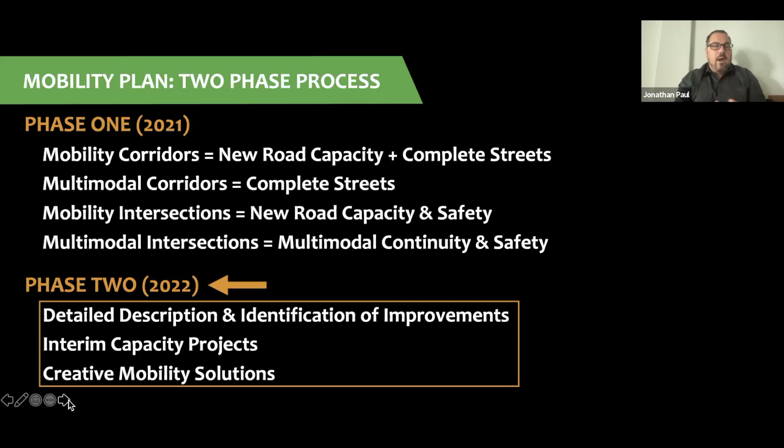That formed the basis for the mobility fee, with the intention that further detail would come as part of the Phase 2 mobility plan, which is where we are today. This is a detailed description and identification of improvements, both multimodal and for roadways, identifying interim capacity projects that could be done in the next few years, and longer-term potential widening of roadways. We also focus quite a bit on creative mobility solutions to get people around by means other than driving. That's really where we are in terms of Phase 2 of the mobility plan.

Previously, prior to the city adopting a phase 1 mobility plan, the priority and emphasis was really on vehicles and moving cars as quickly as possible, evaluating longer trip lengths, addressing roadway crashes, and really designing a system for commuting by vehicle.

The streets of the future—the city had already done a comprehensive plan amendment that laid the groundwork for a mobility plan and a multimodal system. Phase 1 took it to the next level.

Phase 2 gets into the overall detail of projects, with a priority on lowering vehicle speeds on local and collector roads. There's a direct connection between speed of travel and safety for people walking, bicycling, and accessing transit. So we want to emphasize slower speeds on local and collector roadways and safety for all users on arterial roadways.

We also want to focus on accessibility—how easy it is for people to get to and from wherever their destinations are.

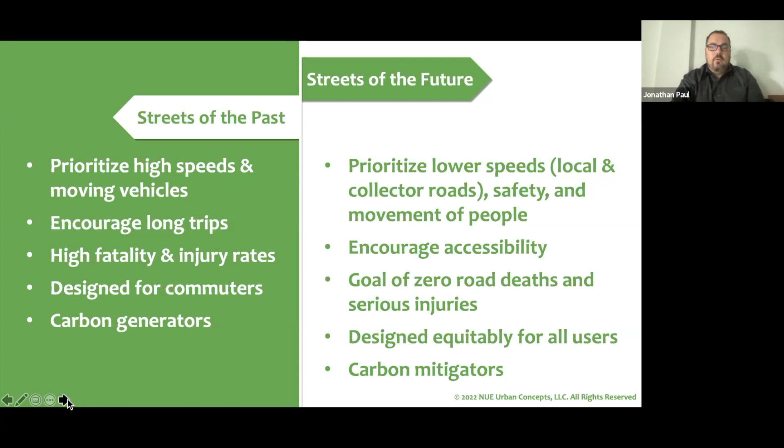Beyond just walking, bicycling, or driving a car, there are new forms of travel being considered all across Florida—whether an electric bike, a neighborhood electric vehicle or golf cart, electric scooters, water taxis, or even ride hailing and ride share services.

Most people are familiar with Uber and Lyft, but those are becoming an increasing way for more and more people to get around other than just driving.

There's also an opportunity to look at our streets differently. I call it, in some respects, complete streets 1.0—that's where we've been for the last 20 years in transportation planning and engineering in the state of Florida.

The focus has been on just getting a base level of facilities, whether a 4-foot bike lane or a 5-foot sidewalk—just a bare minimum multimodal addition to our street cross sections.

As more and more communities across Florida are urbanizing, and they've reached the point where they've already 4-laned or 6-laned roadways, there really aren't a whole lot of road capacity alternatives open anymore. If they are, they're fewer as part of the overall network.

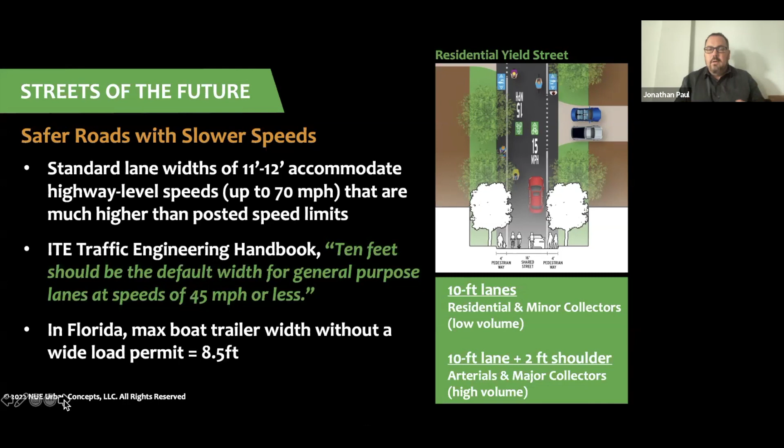So moving forward, a lot of the cross sections we're proposing are looking at 10-foot travel lanes for local streets, and arterials and collectors also having 10-foot lanes, but then providing some buffer for 2-foot shoulders - the visible travel lane itself narrowing down to 10 feet in width, in addition to the multimodal improvements that we're talking about making.

Streets of the future, especially within Port St. Lucie itself - most of the roadways in the community are known as open drainage or swale roadways. They're actually designed to hold stormwater when it rains on the side of the road.

And some of the old portions of Port St. Lucie itself - a lot of residents, or people that haven't been in Florida a long time - some of those neighborhoods that are built in the 70s and 80s, even early 90s, during that time, there was a trend for the roadways themselves to actually accommodate a foot of water.

So the roadways themselves in communities were actually part of the stormwater system. Somebody coming from up north or from an area with a lot of curb and gutter roadways might think there's always flooding in the city, but in fact that's how most of the roadways were actually designed. Even parking lots and commercial shopping centers during the 70s, 80s, and 90s were sometimes designed to hold a foot of water in them.

But going forward, as we add multimodal facilities, there's going to be a need to add additional vegetation to treat that stormwater as it goes into the aquifer and eventually flows down into the St. Lucie River.

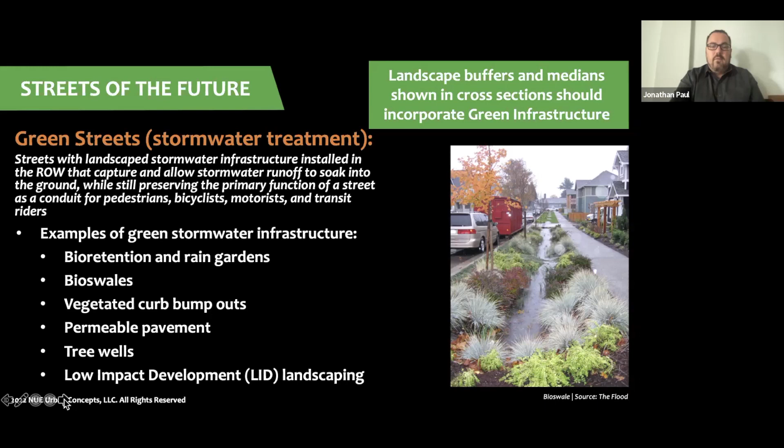So in this phase, the mobility plan phase 2, we're going to show several cross sections and maps, but ultimately there will be maps, cross sections, and a very detailed table explaining what's being proposed for each roadway corridor in the city that's a collector or arterial roadway. Some of these corridors may have multiple phases, where there's a multimodal improvement initially, and then eventually a widening or additional multimodal improvements.

So these are some of the corridors we're going to look at. As we proceed further as part of this overall mobility plan, there'll be several graphics like this produced with St. Lucie examples.

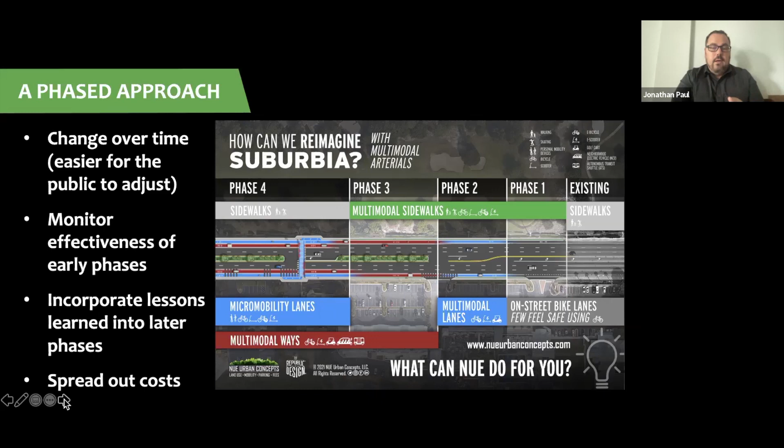So the focus was really on corridors for the phase 1 mobility plan, and we built on that for phase two. This phase two is really focusing on the speed of travel.

People walking go between 1 and 7 miles an hour. People bicycling go anywhere between 7 and 15 miles an hour. People on a scooter or an electric bike could go upwards to 15 or 20 miles an hour. People on golf carts and autonomous transit shuttles can go up to 20, and shared mobility as well.

So really, all these speeds of travel are less than what most cars and most posted speed limits are on roadways. I believe the lowest posted speed limit on a street in the city of Port St. Lucie is 25 miles an hour, that's the lowest. So all these modes of travel we're talking about actually travel slower than the lowest posted speed within the city itself.

This mobility ordinance is going to also be setting the stage for what's known as micromobility. These are electric bikes, electric scooters, segways. Some people may have seen people riding along with a skateboard with one wheel in the middle of it, called a one wheel. There are a whole bunch of micromobility devices out there, but electric bikes and electric scooters are the most common ones. The plans we're talking about really look to add facilities for those modes of travel.

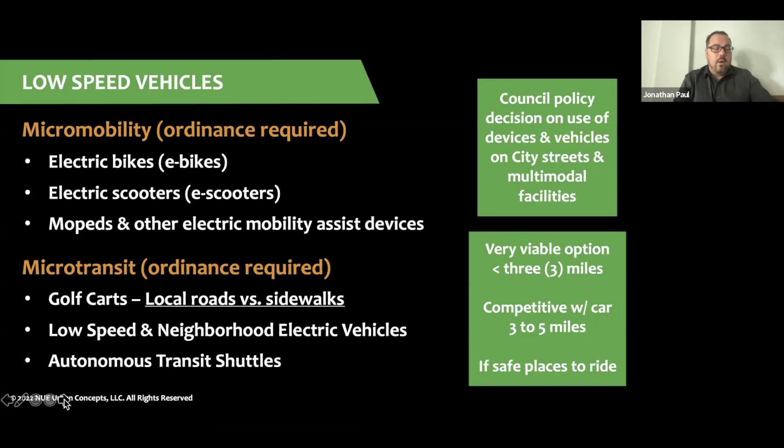Increasingly, I don't believe there are actually any in Port St. Lucie yet, there will be on Floresta, but several communities' Department of Transportation is moving towards what's known as a buffered bike lane. So you have a 4 to 5 foot wide space for a bicycle, and then a 2 to 3 foot wide space that either has double lines on it, or double lines and what's known as a chevron marking or skip marking along it.

Then you have protected bicycle lanes, where there's actually a raised median or some type of physical barrier between the roadway travel lanes and the bicycle lane itself.

What we're calling multimodal lanes - think of a 5-foot sidewalk, but it can also be used by a golf cart or an electric bicycle or an electric scooter. That would be a multimodal lane.

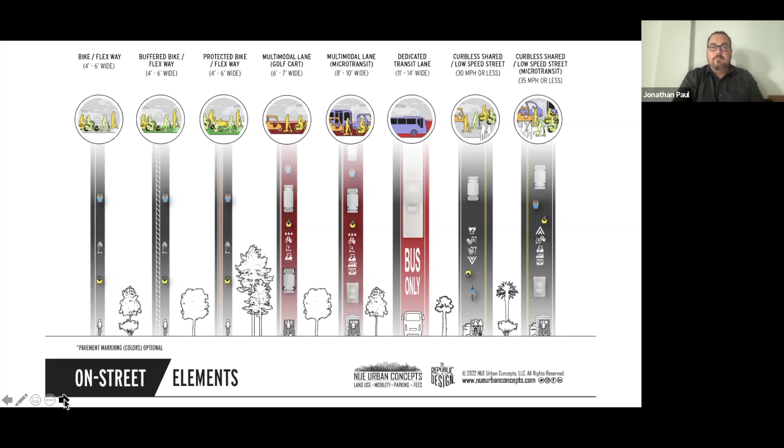And then there are other types of facilities that are basically a shared street, where these electric modes of transportation share the street with motor vehicles. So those are all types of on-street facilities that we've looked at.

We're really focused heavily on providing off-street facilities. One, they've tended to be safer. Two, they get a lot more visibility from people walking and biking. And three, most people feel safer actually using them, so they have a much higher utilization rate. So a lot of the improvements we're going to be talking about are actually off-street facilities.

If you look at Village Parkway or portions of Traditions Parkway, they're adding off-street facilities for various multimodal and micromobility vehicles. The first one's actually like an off-street bikeway - a separated bike lane or bike path for bicycles and scooters, separated from traffic. Then you have a bi-directional bikeway or cycle track, separated from the street. And then eventually you get up to sidewalks.

Most people know what a sidewalk is, for 5 to 7 feet. They're really not appropriate for golf carts to be using, and quite honestly, they're not appropriate for electric bikes or electric scooters to be using either, especially with people walking.

Then you have a shared use path, which allows people walking, bicycling, or using a scooter. And what we like to call this is people powered. Think of if you're using your own two feet to move, whether you're scooting, bicycling, or walking, that's a people powered facility or a shared use path.

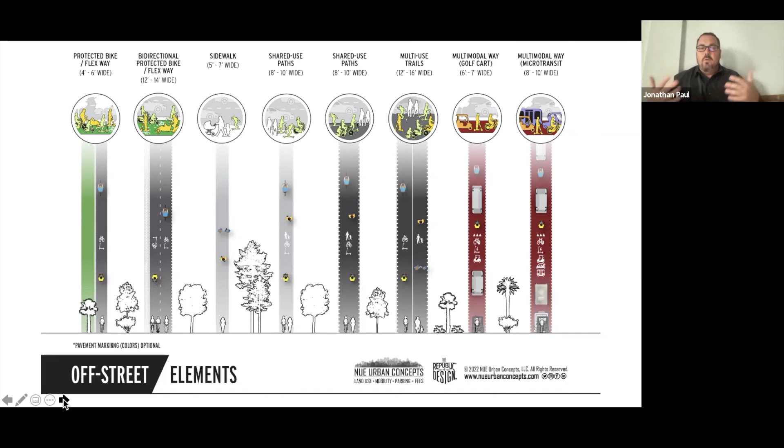So this is kind of just providing a bigger overview, and then we're actually going to get into some of the more specific types of improvements here. But just in general, Port St. Lucie is a very large city. It's got an extensive roadway network, and not all the roadways are the same. So we've sort of developed some criteria for how we're going to look at roadways.

And so the ideal multimodal scenario is you have a separate space for cars, a separate lane or way for electric powered vehicles, scooters, bike, golf cart, and then a shared use pathway or a trail for people walking, bicycling, or scooting using their own feet.

As an alternative, the multi-use trails or shared use paths that are at least 12 foot to 16 foot in width could be used for people powered micromobility and golf carts. So really you're looking at the width at that point, and the minimum preferably is 12 foot wide to safely accommodate all these different users.

And the third alternative that we've sort of looked at is where we can't have separate facilities because of right of way. We'd look to have an on-street multimodal lane for electric powered vehicles. And this is primarily roadways that are posted speed limits of 40 miles or less. So you're not going to necessarily see this out on...

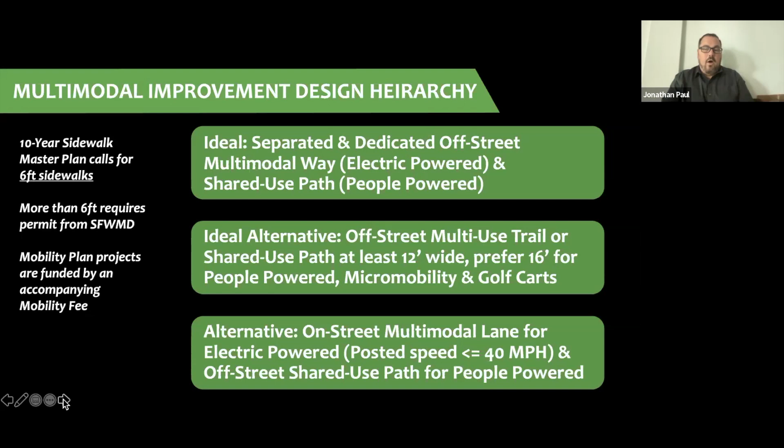Gatlin or Port St. Lucie Boulevard, or some of those types of roadways on street. We're going to focus on off street for those. But most of the other roadways in the city could have an on street facility and then an off street for people walking or people bicycling.

And then again, there are several other alternatives. I'm not going to spend a whole lot of time on them. These are basically our fallbacks. If we can't do a wider facility or we can't do separate facilities, we'll look at either an 8-foot shared use path, on-street travel lanes shared with vehicles for roadways with a speed limit of 30 miles or less, and then a separate sidewalk or path.

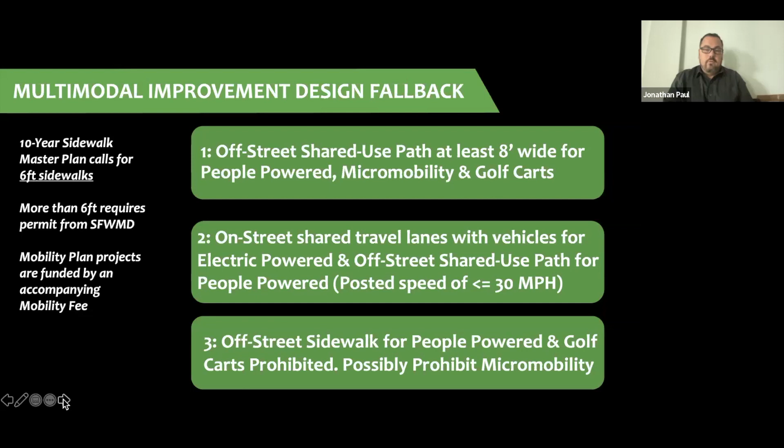And then there will be some corridors where there's just not room. So there'll only be a sidewalk on that roadway, collector or arterial, and golf carts will be prohibited on those roadways. And possibly there may be a prohibition against electric scooters and electric bikes as well. So there are a couple of corridors that are going to fall under that scenario.

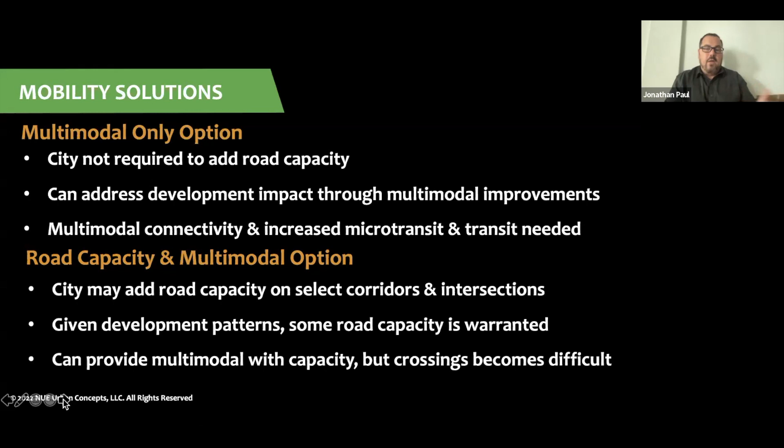So mobility solutions that we looked at, first is multimodal only, where we're going to add those type of facilities I just shared with you. The second is focusing on adding road capacity in addition to those multimodal improvements. And so we're focused first on the multimodal network. And as we're moving forward, we're kind of identifying tiers or priority corridors.

Secondly, we're looking at major multimodal corridors. And then the next phase will be minor multimodal corridors and then sort of sidewalks or local.

So any of you that are familiar with street terminology, you have principal arterial roads, which are your interstate systems, or your major, your crosstown, or your Port St. Lucie Boulevard, or US 1. Then you have major arterials, which would be your St. Lucie West Boulevard or your Village Parkway, Becker Road. Then you'd have minor collectors, local roadways. So we're actually developing a similar type of terminology and typology for multimodal facilities as well as we move forward and develop the plan.

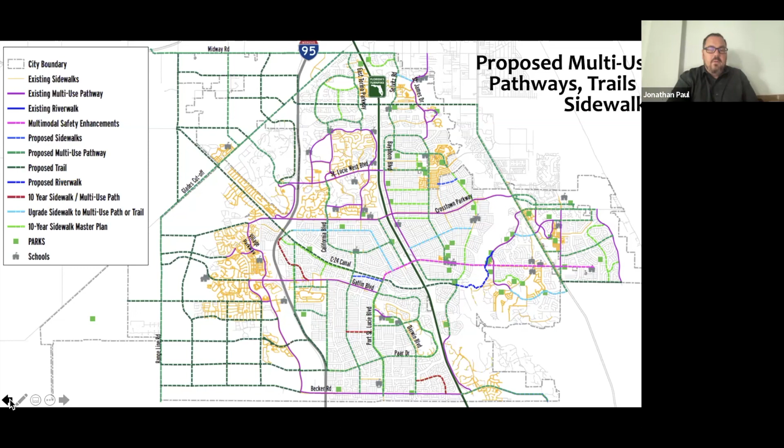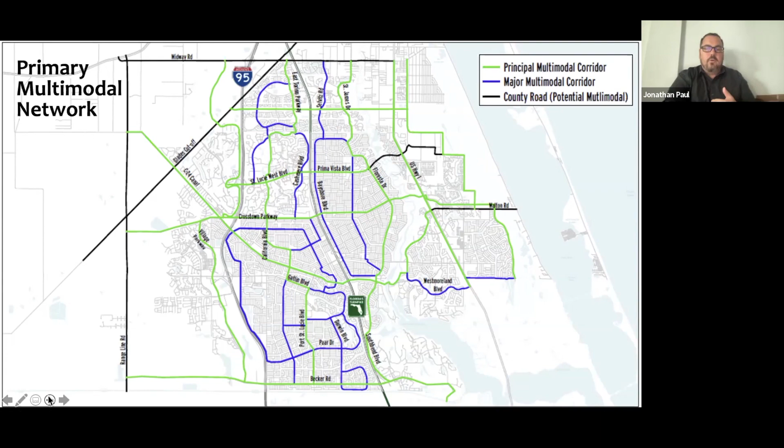From an overall perspective, to see how everything fits together, we lay out principal, major, and minor collector corridors. This helps with both the prioritization of projects and the emphasis on which corridors provide the most access to schools, parks, places of worship, employment centers, and major residential developments.

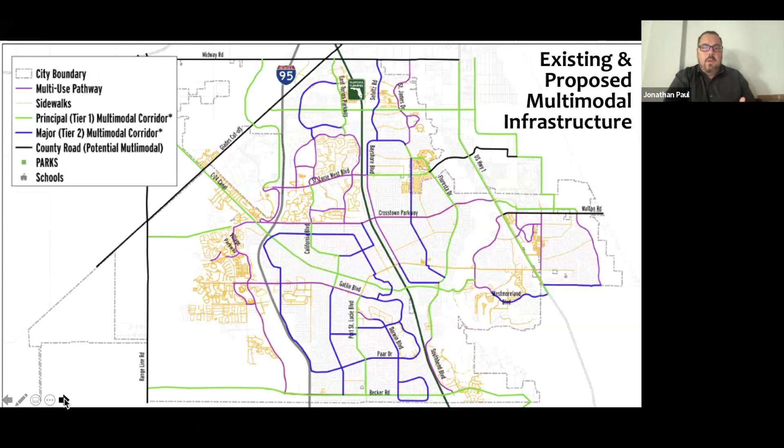As part of the phase 1 mobility plan, we looked at what roads we're adding capacity to—either a new road or widening a roadway—versus what roads are only focused on multimodal improvements. At the time, we also considered county roads in our analyses, but since then we've come to a mediated settlement with the county, where they'll plan for their roadways and the city will focus on its corridors and the state roads running through Port St. Lucie.

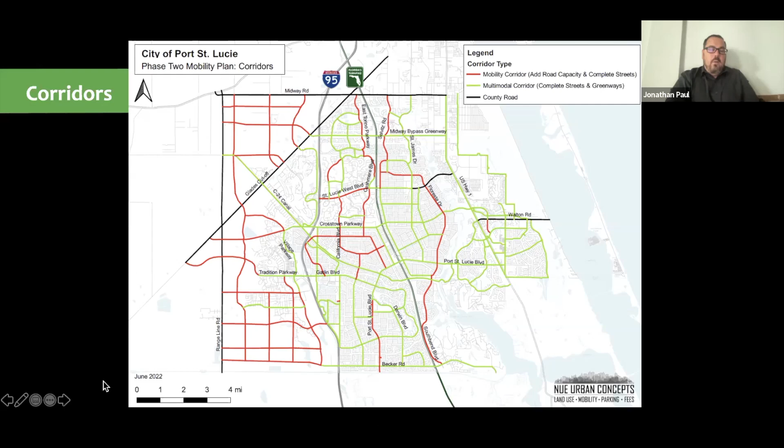Everything shown in red is where there's a proposal to add road capacity. Everything shown in green is where there's a multimodal-only improvement. This map has actually been updated from the one in the phase 1 mobility plan. In addition, in phase 1 and phase 2, we identified a number of potential intersection improvements. This map reflects where we're at today, not where we were in phase 1, so a lot more facilities have been added.

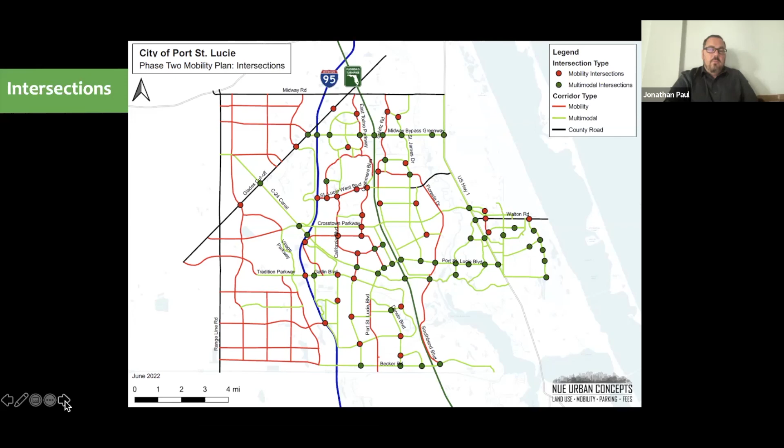This is a further breakdown of what types of improvements are going to be made. In terms of adding capacity, there are new roads that will include multimodal elements. Every single new road is west of Interstate 95—that's the brown burgundy colored line you see.

Those roadways are primarily being built by future developments as part of their obligations to develop. They'll build that network in the future, along with a supporting local network as part of their developments. Those roadways are largely an obligation and responsibility of new development, and they'll be designed with complete street elements—primarily new road corridors.

We're going to evaluate a few further—portions of Village Parkway and Community Parkway have future plans to add additional lanes. I think we'll call those a future phase much further out, so there should be adequate road capacity with both what's built today and what's planned. Village Parkway may ultimately need to be 6 lanes, but with multimodal improvements, it's possible that corridor could stay 4 lanes.

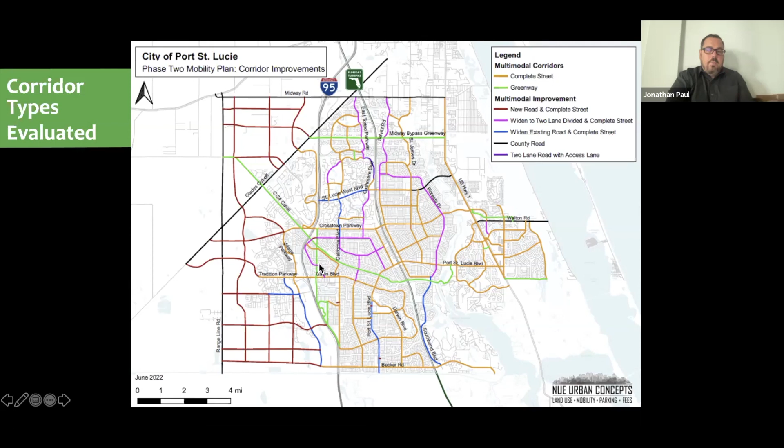We're also looking at a few major Greenway corridors, going largely along either power line easements in the northern part of the city, the C-24 canal in the central part, or along a power line strip easement parallel to 95.

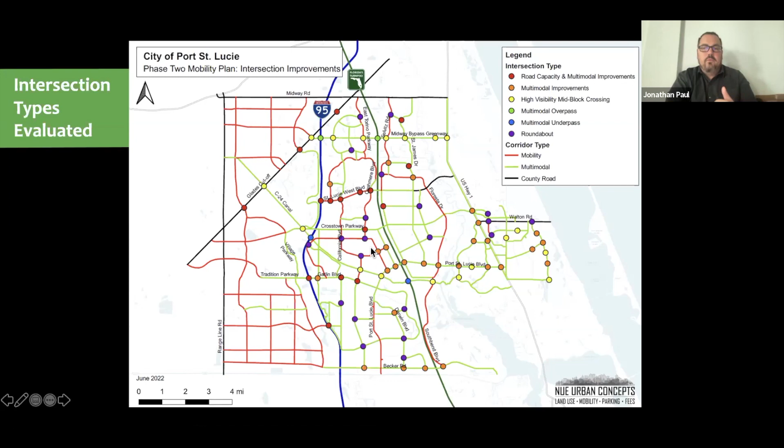Similarly, we've also looked at multimodal intersections in terms of whether they need a roundabout, turn lanes, or multimodal improvements. Again, you'll see several additional projects added between this phase and phase 1. The orange and yellow markers represent multimodal improvements - the orange to improve crossing those roadways, and the yellow are mid-block crossings or along trails, like the C-24 Canal Trail where it crosses major roadways. This is the Greenway to the north, and each one of those shown crosses a roadway. In addition, there are a few other multimodal improvements planned within the city.

So with that said, that provides the bigger foundation. Then we've gone pretty much corridor by corridor and further evaluated them. The first one we looked at is St. Lucie West from 95 to Cashmere.

The roadway carries about 37,000 cars a day today, with a capacity of about 40,000. By 2045, we project almost 60,000 cars a day using St. Lucie West - that's way more than a 2-lane or 4-lane road can handle. So one of the things we evaluated for St. Lucie West was adding an additional through lane to make it a 6-lane roadway.

In addition, we're proposing to add multimodal ways on both sides of the cross section to accommodate golf carts and neighborhood electric vehicles. We've gone back and forth on whether autonomous transit shuttles would be appropriate there. One concern - will they work great out in Tradition where you have controlled access? This portion of St. Lucie West Boulevard has driveways every 200 feet, so there are a lot of crossings for an autonomous shuttle to address. It's something we're going to have to further evaluate.

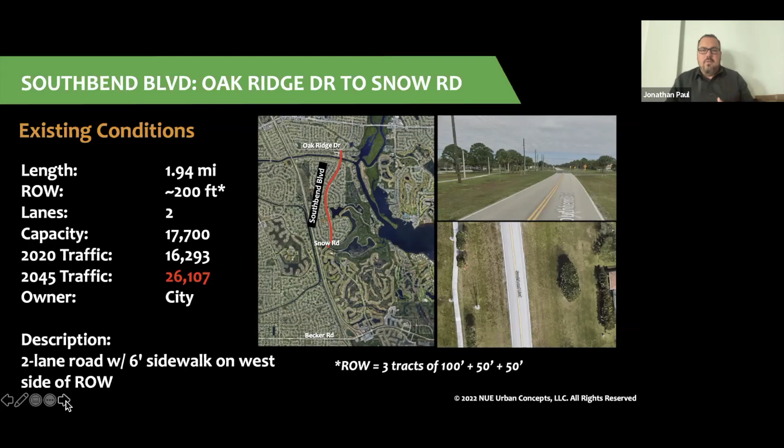South Bend - the corridor today is carrying roughly 16,000 cars a day from Oak Ridge all the way down to Snow. In the future, we're expecting it to carry upwards to 26,000 cars a day. A 2-lane road, when congested, can handle about 20 to 25 thousand max. Once you get beyond 20,000, you really have to look at adding some additional lanes.

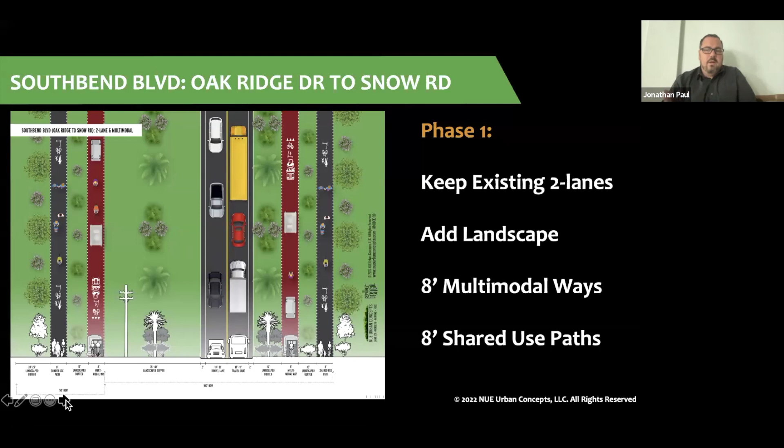So what we're proposing on South Bend is a 2-phased approach. Phase 1: keeping the roadway where it is today, and adding shared use pathways for people-powered transport with highly amenitized landscaping, plus an additional 8-foot multimodal way for golf carts and neighborhood electric vehicles. Potentially, they could even accommodate an autonomous transit shuttle - here you don't have as many driveways, so it may actually work. That would be phase 1. Phase 2 would eventually be 4-laning that facility.

As you see there, the travel lanes are marked as 10-foot to 11-foot lanes, with a shoulder on both sides. That's to try to slow those speeds down a little bit on these roadways, while still recognizing that the shoulder provision accommodates buses, people pulling boats, and larger vehicles that need to move. But for the most part, cars would visibly be seeing a narrower travel lane.

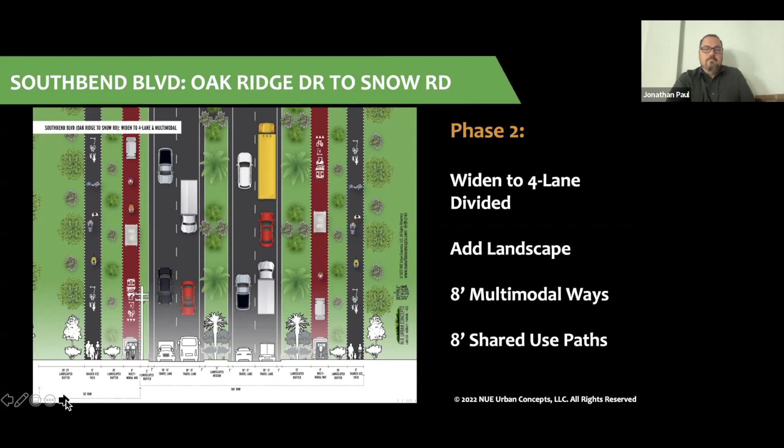Further on from Southbend, from Snow down to Becker, where you get out of the residential subdivision to the north in this community, once you get south of that there actually are no developments that have access to it. This golf course community has a berm along this whole way, so there aren't a whole lot of driveways there. That's projected to carry upwards to 24,000 by 2045.

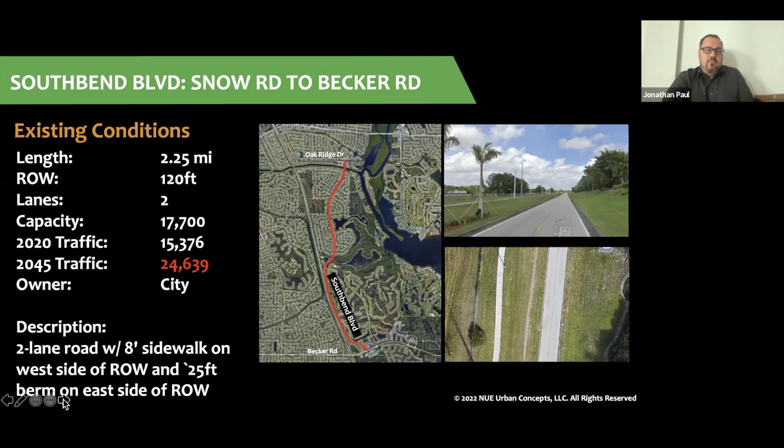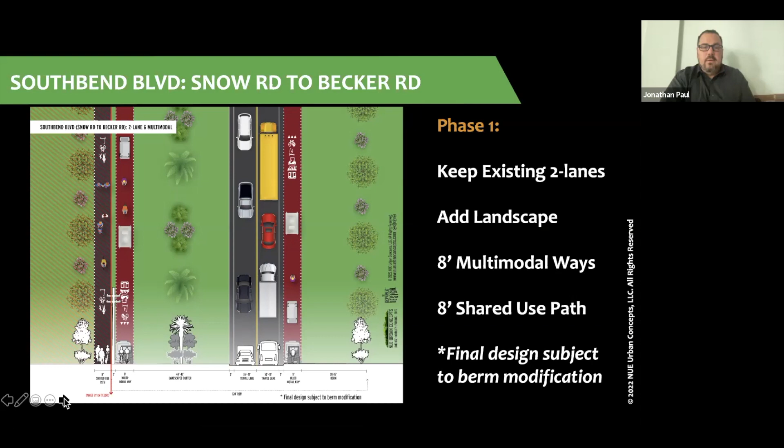Could it function as a 2-lane? Yes. Would it be extremely congested? Yes. So we're actually proposing a 4-lane Southbend Boulevard. Initially we'd look to add multimodal facilities. There's already a shared use pathway out there, so we'd look, especially at the distance.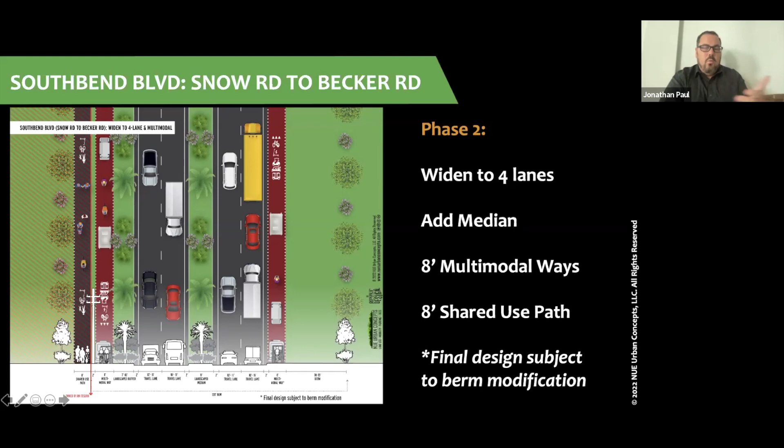I think it's almost 2.5 miles from that subdivision down to Becker. At that distance you're really talking more golf cart, neighborhood electric vehicle, electric devices, or somebody walking or jogging for exercise, but that's quite a bit of distance for day-to-day transportation. So this is how a 4-lane facility would fit in with multimodal facilities along both sides.

We've also recently looked at one of the big questions we've been asked consistently for over a year now: if you're 4-laning South Bend, what happens when you get north of the C-24 canal? Right now that roadway would either go east and use Floresta, or go west and use Oak Ridge and Bayshore. So we've kind of been struggling with this.

South of Oak Ridge there's a roughly 120-foot right-of-way that goes along the entire length of it, then you have the roadway itself, and then from this connection over to the turnpike, Bayshore Boulevard is actually a 100-foot right-of-way. Most of the driveways on the east side of the road come off the side street, whereas along Floresta and Oak Ridge all the driveways are directly to these roadways, so there's a lot of connections there.

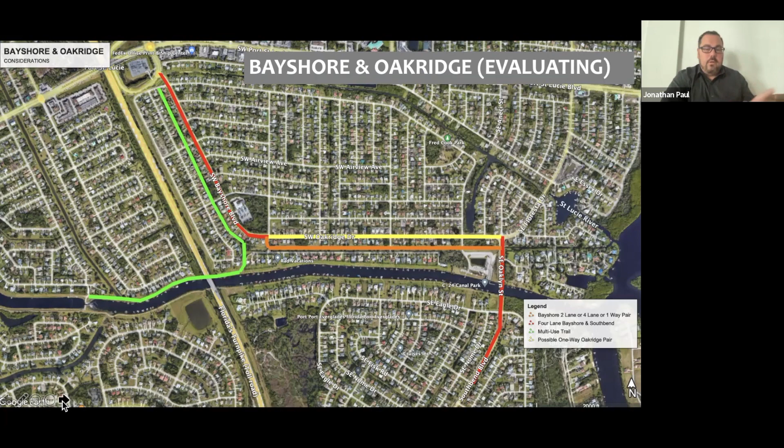And then there's a large 50-foot wide canal, drainage easement, green area along Bayshore that could actually serve as a really nice linear park. This would tie into a larger multimodal system using the C-24 canal all the way out past Traditions. That's something we've just recently come across because we've been consistently asked through both the outreach we've already had and through the phase 1 mobility plan: that's great you're doing South Bend, but how do we make the connection between the canal and Port St. Lucie? So this is one of the alternatives we're looking at.

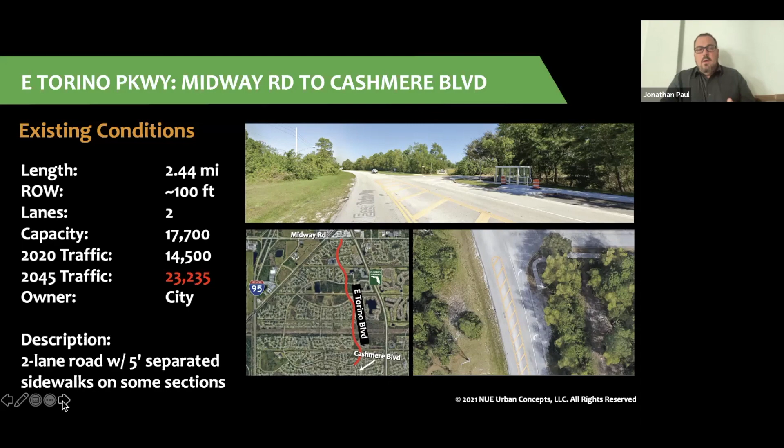The other corridor we looked at is East Torino to the north, coming south of Midway, going all the way down to, depending on what nomenclature you use, the connection to Cashmere or Peacock down there. That roadway today carries about 15,000 cars a day. In the future it's projected to carry about 23,000. It's over the 20,000 limit but under 25.

So we're actually looking at multimodal facilities along that roadway, widening it to a 2-lane divided to take out some of the turning movements from that corridor, adding a shared use pathway on both sides of the road, and then adding multimodal ways to both sides of the road as well.

You'll see on these corridors these sections are actually smaller. We don't really believe the densities, intensities, or mixture of uses up here would justify an autonomous transit shuttle or a wider transit circulator. But there could still be people using golf carts, or some type of transit service provided through neighborhood electric vehicles. Both of those could be accommodated on a 6-foot wide multimodal way as opposed to a larger facility.

So this is the one thing that we're going to recommend for East Torino Parkway. The other corridor we looked at is 4-laning that roadway. Some feedback we've had to date: if you have a 2-lane road today and add multimodal to it, and that doesn't solve traffic, and you have to go to 4-lane, would you still keep those multimodal improvements? That's actually a really good question, because in some respects the multimodal didn't work as well as you'd hoped, and now you need the 4-lane road. We think initially it can work, and it can work quite well. But if not, we have looked at the option of 4-laning Torino Parkway.

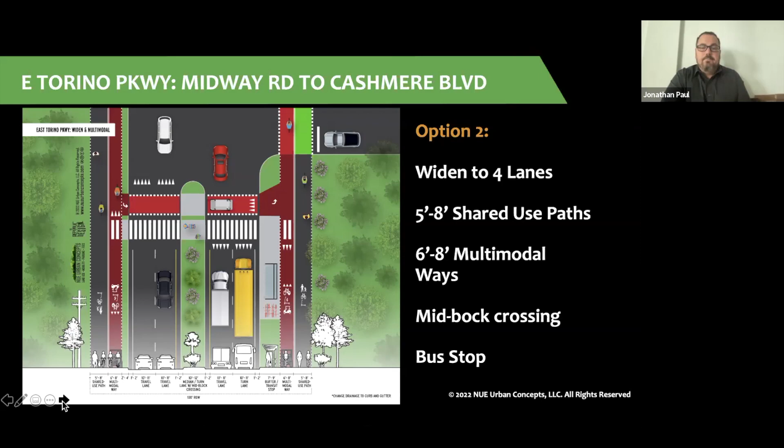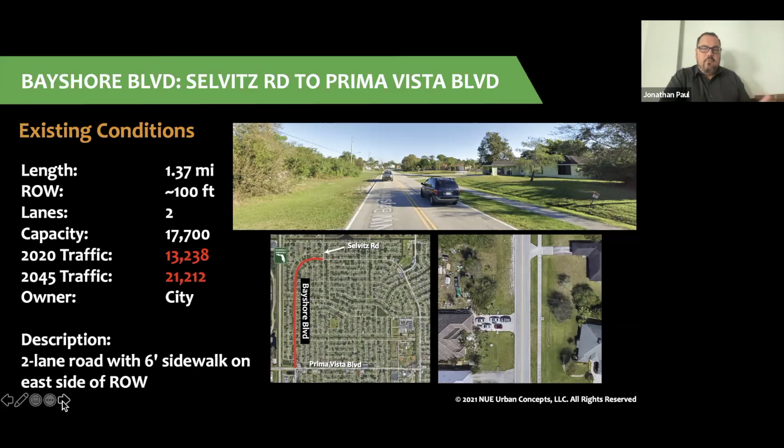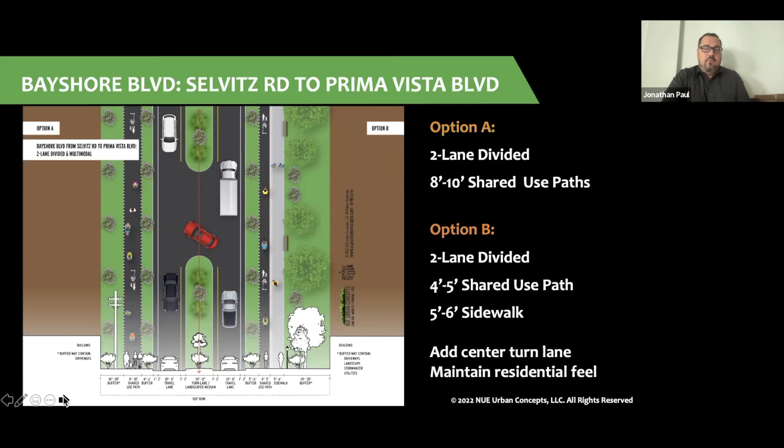We've also looked at Bayshore between Selvitz and Prima Vista. Similar to Bayshore south of Port St. Lucie, that's a 2-lane roadway today. This is also a 2-lane road, but unlike that section, all the homes along it take direct access to Bayshore, similar to what's along Floresta. So it becomes a little bit harder of a facility to think about 4-laning. It's 13,000 cars a day, projected to go upwards to 21,000. Again, it's a lot of traffic, but it's not quite the trigger to really say you should 4-lane it. So we are looking at the potential to go to a 2-lane divided section, or at least a 2-lane with raised medians in certain portions of the roadway, and then adding either a shared use pathway on one side or both, or a separate facility for bikes and a separate facility using the existing sidewalk. There are several multimodal options available for this corridor. We did look at 4-laning it, but given the sheer number of driveways and the fact that volumes weren't exceeding 25,000, our recommendation is going to be a 2-lane divided.

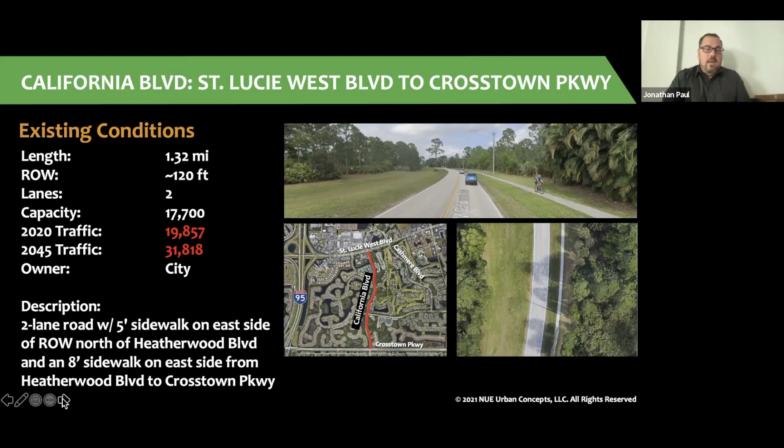We've looked at California from St. Lucie to the Crosstown. This roadway carries almost 20,000 cars a day as it is, and it's projected to go up to 32,000. There are already plans to 4-lane this roadway, so we really didn't look at a phase 1 option because the volumes warrant a 4-lane road. We looked at how the multimodal facilities could be configured, and how that fits within a 4-lane cross section. I believe the city's public works department is actually engaged with an engineer right now, who we've had conversations with, who is designing a facility that looks similar to this: 4 travel lanes, 2 separate lanes for electric vehicles - i.e. bikes, scooters, golf carts - and then 2 other lanes for people walking and bicycling.

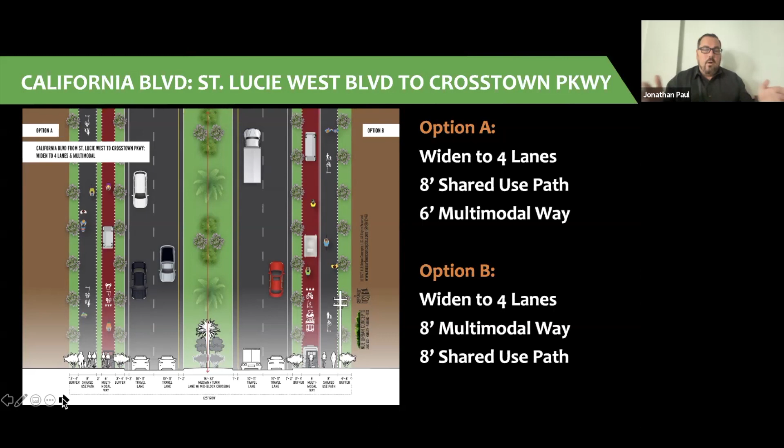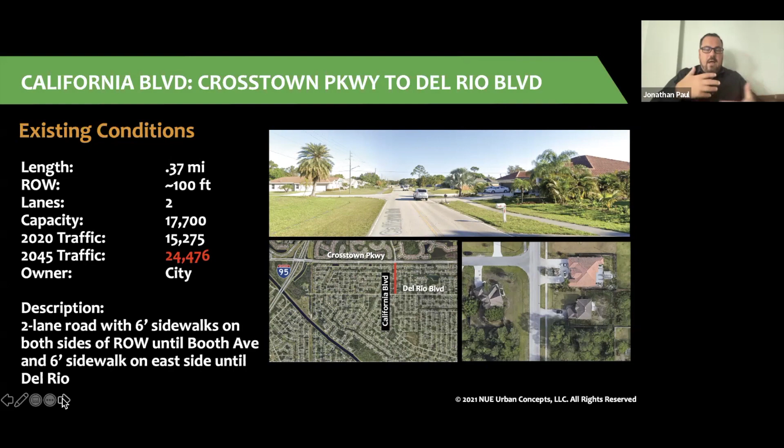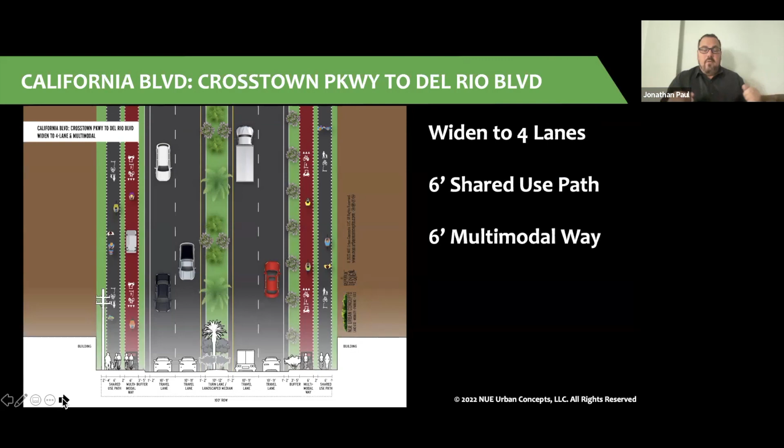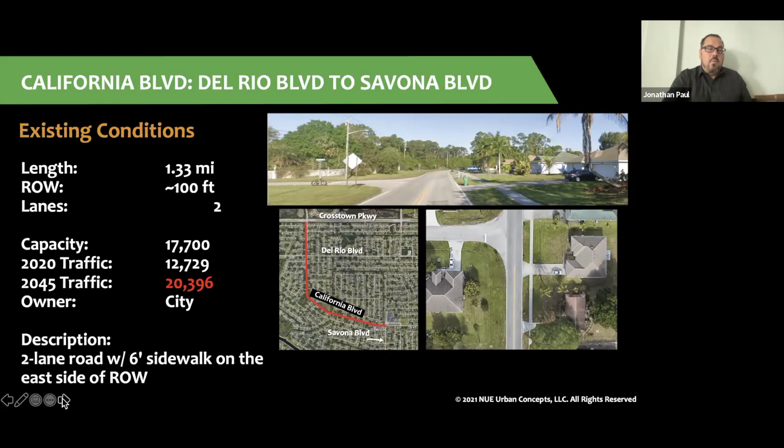We looked at California further south. Initially between the Crosstown and Del Rio we considered the 2-lane divided. But given the traffic and the fact that it's going to approach 25,000 on that section of roadway, we are recommending 4-laning it with multimodal facilities on both sides. But then when you get south of Del Rio, going down to Savona, the future volumes drop from that 25,000 threshold down to 20,000. There we're actually looking at a 2-lane divided facility. Think of the median similar to what you see on Floresta today, but then either having shared use pathways on both sides of the roadway, or a sidewalk and a multimodal way on both sides. The right-of-way is wide enough to accommodate multiple sections. I think drainage, as they go to the next phase of design, will be the bigger determinant of what type of multimodal facility you'd have there.

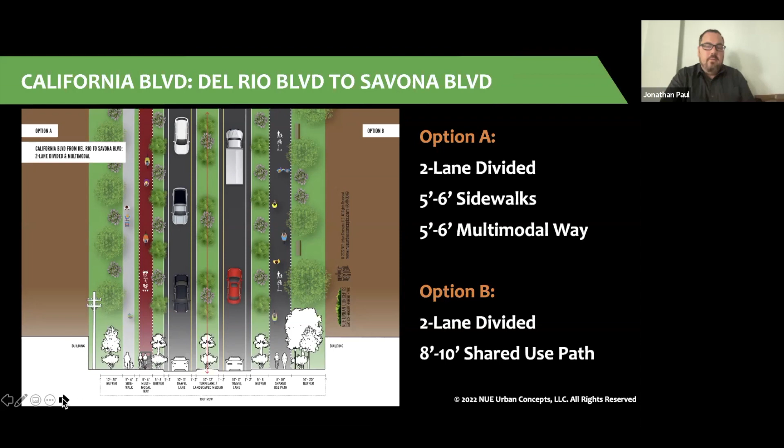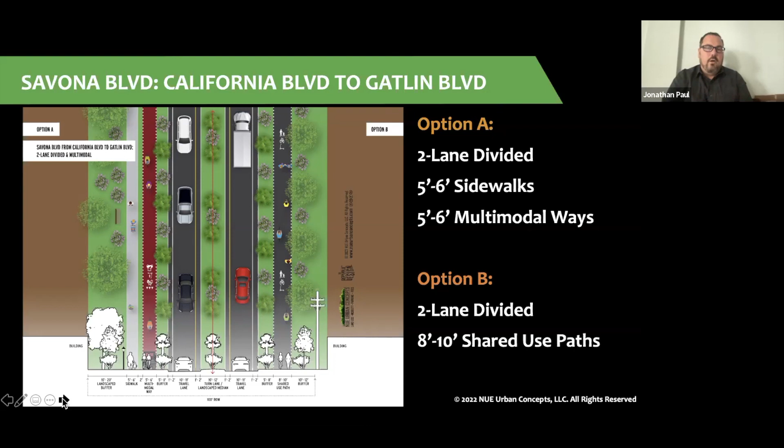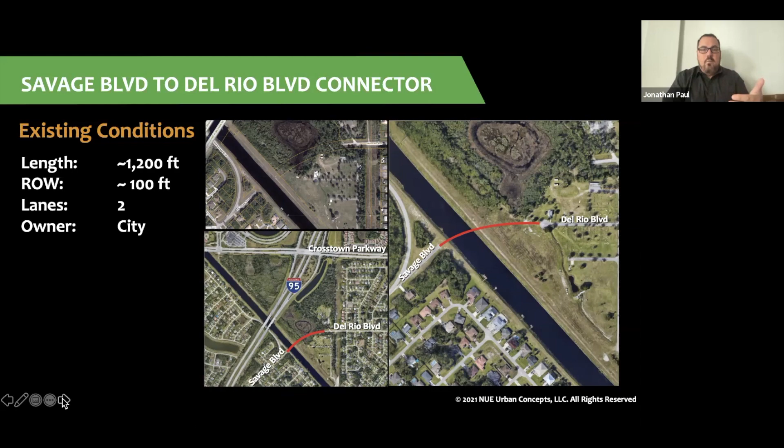Similar to California, we looked at Savona, and honestly Savona was really close - it's above 22,500, not quite to 25,000, but close. So we are still recommending a 2-lane divided, because we're going to share with you another improvement that we feel will actually keep Savona from needing to be 4-laned. We believe that, similar to California, Savona could be a 2-lane divided section. That other improvement: there's actually a right-of-way already in place today, dedicated, that the city owns. There's already a stub for Savage Boulevard going to the C-24 canal, and that right-of-way goes over to Del Rio Boulevard. So at some point there was always a plan to make that connection. We feel that by utilizing Savage Boulevard and making that connection over to Del Rio, you can actually keep from having to 4-lane Savona.

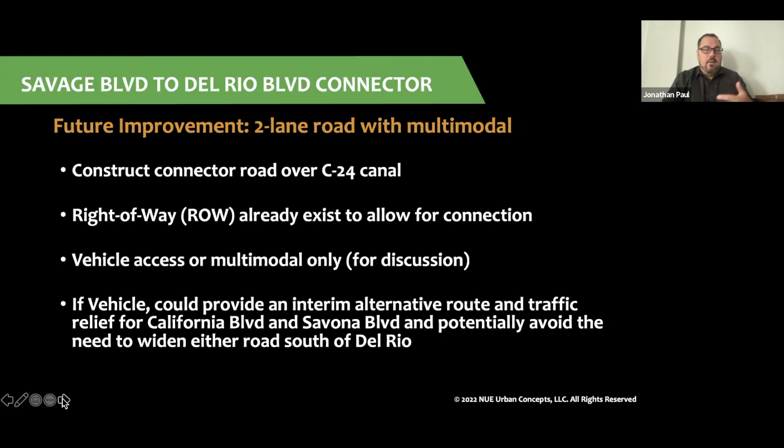So we're further evaluating that. That was not something identified in the phase 1 plan, but it is something we have identified in the phase 2 plan. And we believe it's a viable alternative to 4-laning Savona. This shows you how that could work.

This basically would give you 2 parallel corridors. You'd have Savage, which exists today up until there. You make the connection to Del Rio. So all these people that either go to Savona or go down to Gatlin will have another way to go out into Del Rio.

Once you reach Del Rio, the first major corridor would be California, hence the need to 4-lane that section. But there are also going to be other people using this, and the traffic we've seen on Cashmere. This is another one we had not initially identified, but we are recommending it go to 2-lane divided with additional intersection improvements at the Crosstown Parkway.

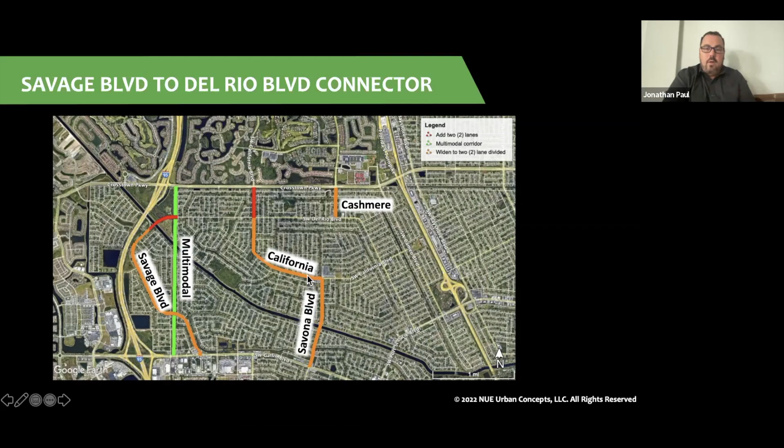But this would provide, through Del Rio and Cashmere, through Cameo, through Savona to California, and through Savage, essentially 4 north-south corridors as opposed to 3. Providing access to all these residents here would certainly provide relief to this portion of Savona as well as relief to this portion of California.

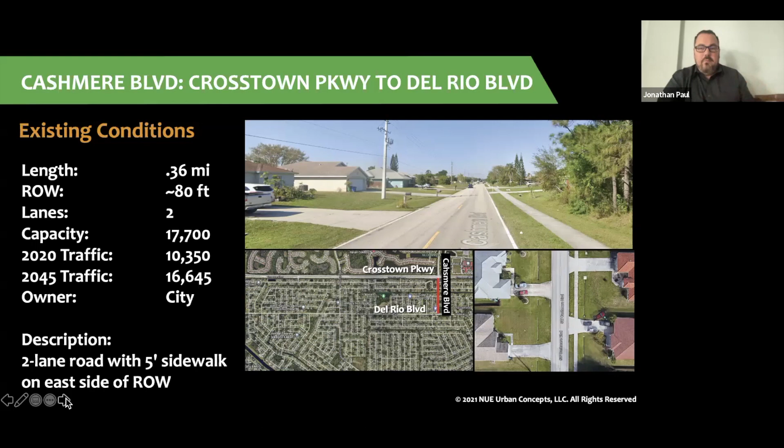Similarly, Cashmere is a corridor that we looked at. The volumes don't warrant 4-lane, but they certainly do warrant a 2-lane divided. So that's what we're recommending, 2-lane divided with additional turn lanes at the intersection of the Crosstown.

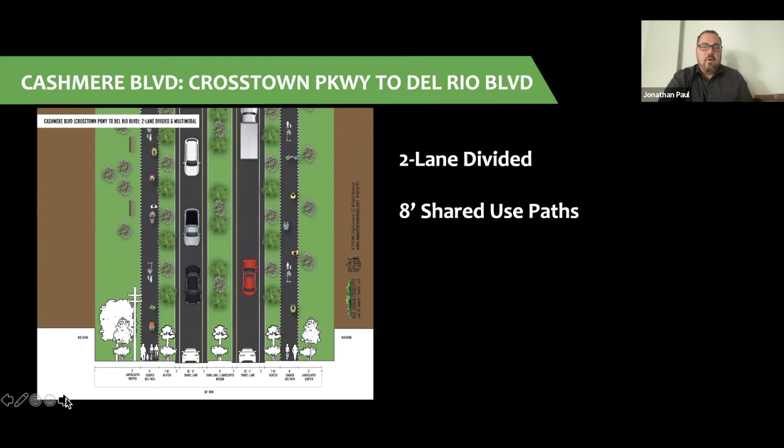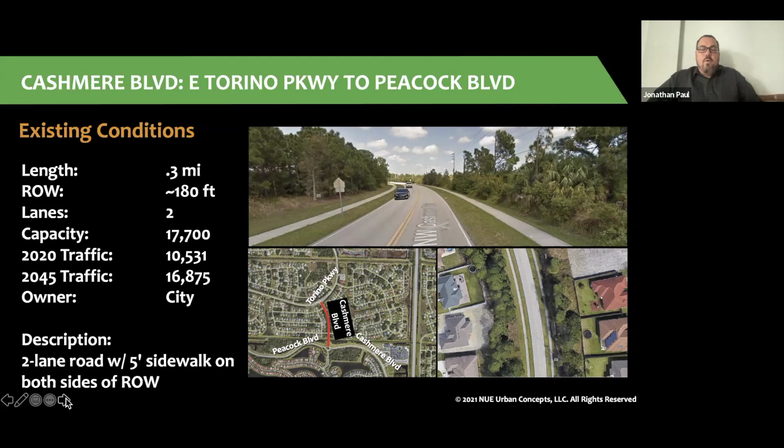Cashmere, which connects Torino and Peacock, the roadway was originally looked at for potentially 4-laning, but the future volumes just really aren't there to warrant that. So we are looking at a 2-lane divided, and the city itself has just recently completed or is completing the roundabout at Torino and Cashmere, which we feel will help facilitate a lot of vehicular movement.

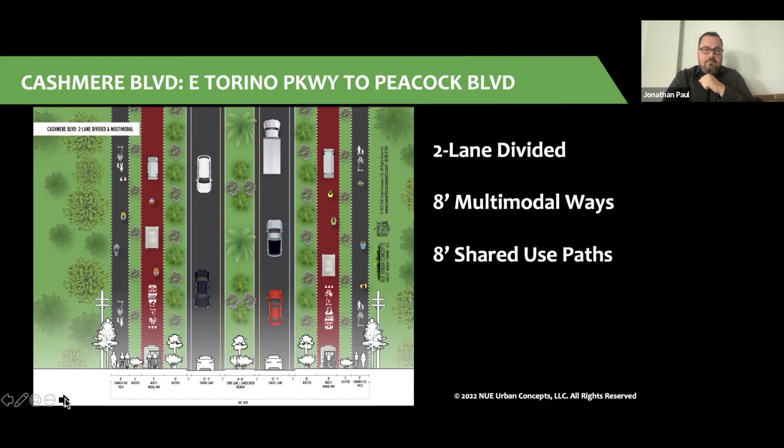We've also looked at Cashmere by the school. This is a corridor that actually has a lot of traffic, largely because of the school itself. And it actually doesn't have enough volume to warrant it being 4-laned.

But what we're going to look at is having some type of access lane, either separated or part of the roadway, going north into the school, plus some multimodal facilities to make it safer for kids to walk and bike along that corridor, or even to ride a golf cart or have a parent bring them on a golf cart from some of the surrounding neighborhoods to the school, to hopefully lessen how many people are driving on there, but also to add a longer northbound lane, recognizing that people are going to get off or pull to the side today to wait for their kids.

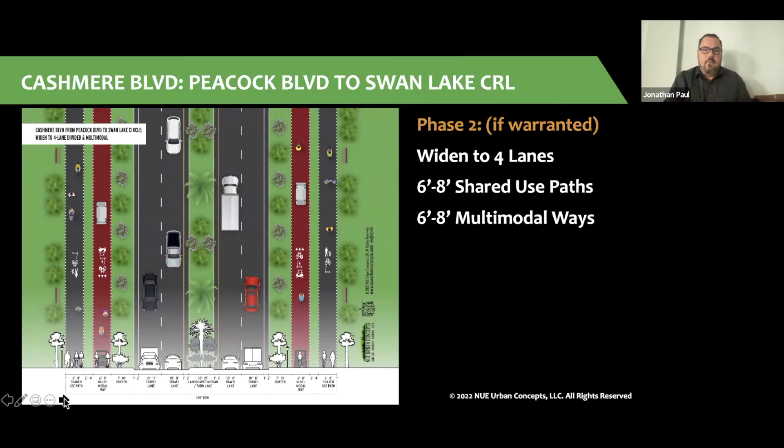We're actually looking at a section that takes that lane and separates it from traffic. So that's something we're evaluating further. But if warranted, we don't feel it will be, but if warranted, there's enough room to 4-lane Cashmere as well in the future.

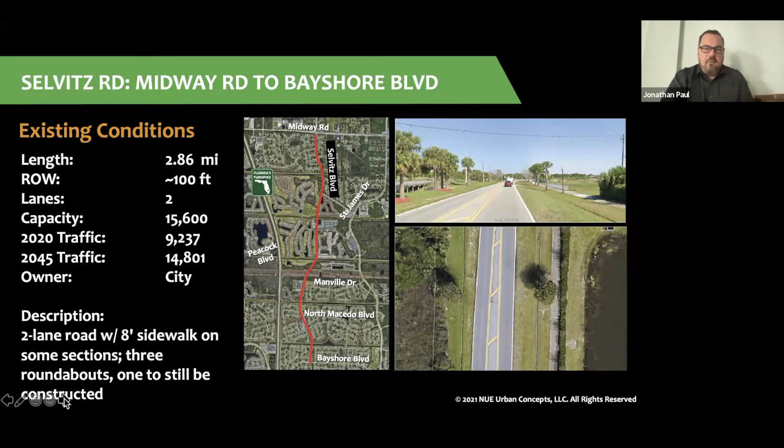We also looked at Selvitz from Midway down to Bayshore. The roadway today is not carrying that much traffic, just under 10,000 cars a day. It's projected to be about 15,000 in the future. So we're recommending a 2-lane divided section with multimodal facilities for that roadway.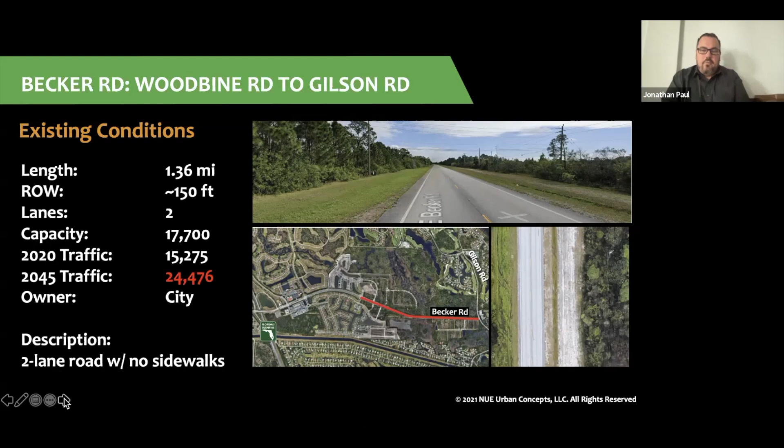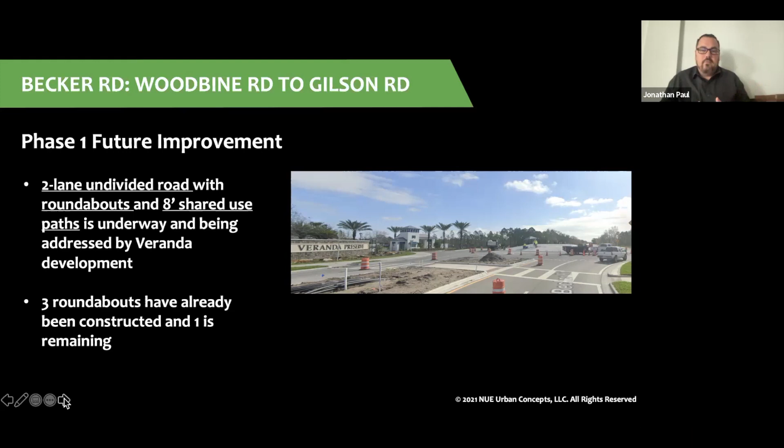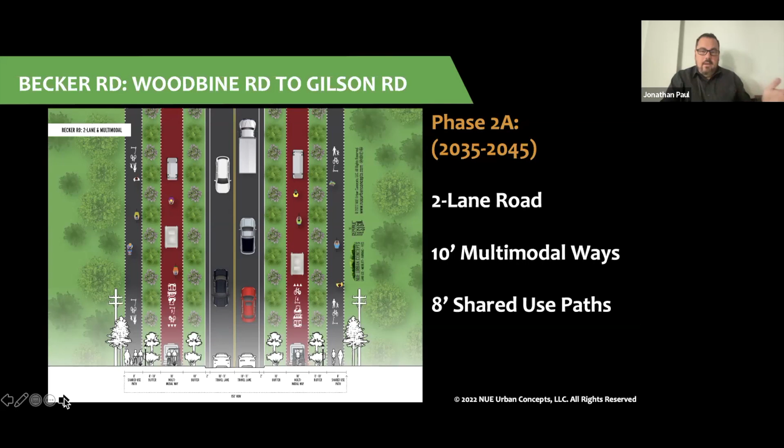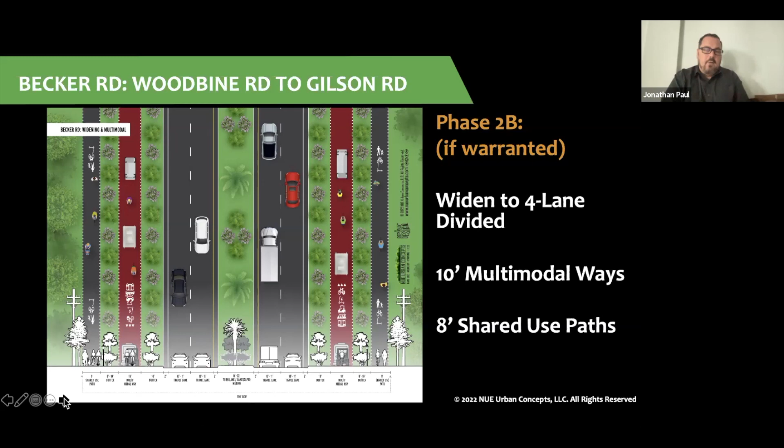It does essentially trigger the threshold, but the developments out there today are actually adding roundabouts at the major intersections and have already constructed some multimodal facilities. There's 3 out there under construction or done, and another one that's going to be constructed. So we're going to see how the roundabouts play out, continue to leave Becker as a 2-lane roadway, and add to the multimodal facilities already put out there, then keep an annual monitoring of it into the future to see about a 4-laning if warranted.

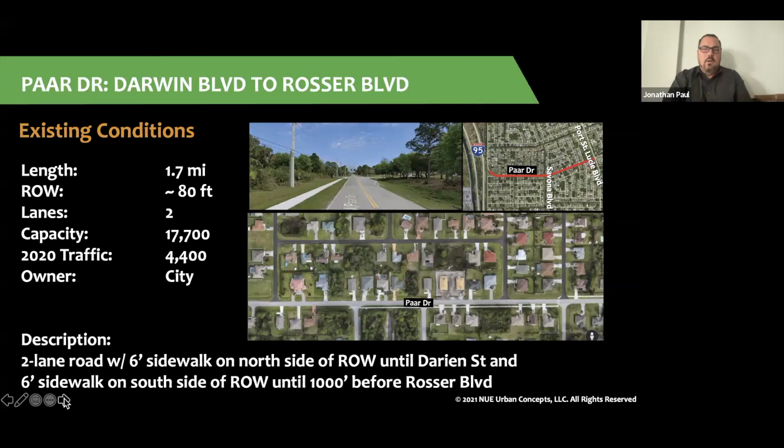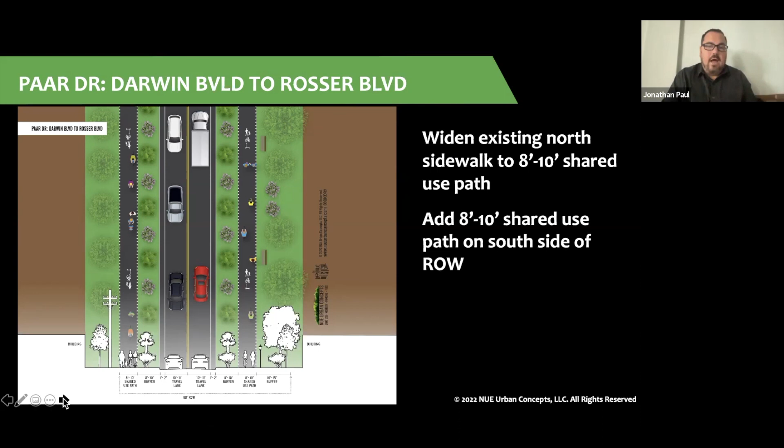Another corridor we looked at, this is more for multimodal, not roadway widening, because the volumes are pretty low, but there are missing gaps on Paar Drive today in the sidewalk network. So we looked at what types of improvements could be done there, and we feel there's actually enough right-of-way to add multi or shared use pathways on both sides of the road and to continue to keep it as a 2-lane roadway.

We also looked at Rosser because there's this big sidewalk gap on that corridor today, and it's only on one side of the street. Unfortunately, because of the limited right-of-way and the drainage situation there, the only thing that will be able to be done on Rosser is to make the sidewalk continuous all the way down to Paar on one side of the roadway.

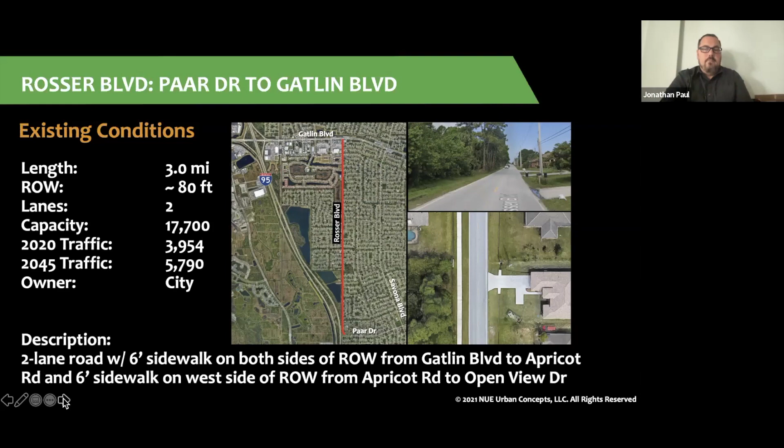An intersection that we have been asked to look at - there's been a lot of neighborhood complaints about the intersection of Dreyfus Boulevard and Rosser Boulevard, and about the difficulty getting out of that intersection. There's not a whole lot we can do. The right-of-way is extremely restricted, and there are homes on all sides of the intersection today, in addition to a driveway that pretty much lines up with Dreyfus.

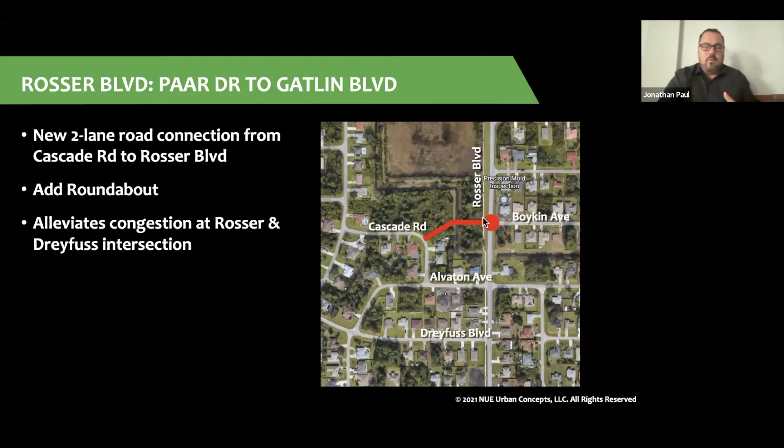So there's actually a large portion of land owned by the city of Port St. Lucie north of the neighborhood. So we think there's an opportunity to extend Cascade Road and then provide a roundabout at the intersection with Boykin. That would actually provide this entire neighborhood with another way to get into and out, and the roundabout allows for a lot more even flow of traffic.

We've also looked at the potential for a multimodal overpass on Paar Drive going into the Tradition community. Something that's probably well into the future, but one that may be a little bit more midterm, and it's been evaluated, is a new interchange between Gatlin and Becker at roughly Marshall Parkway.

Now, this will be a roadway interchange going to Tradition, serving a lot of this future industrial development going on out there. And then to the east, it would actually be a multimodal connection that goes around this existing stormwater pond that the city is proposing to have a park along a portion of there, and also to the north.

And then we feel that since we're limited on Rosser, there is actually a large power line corridor from Paar going all the way up to St. Lucie West. So we're actually evaluating a greenway or a multi-use trail along that corridor.

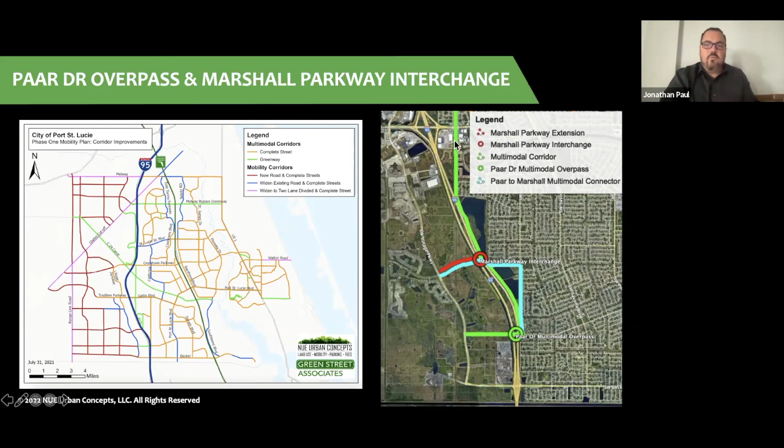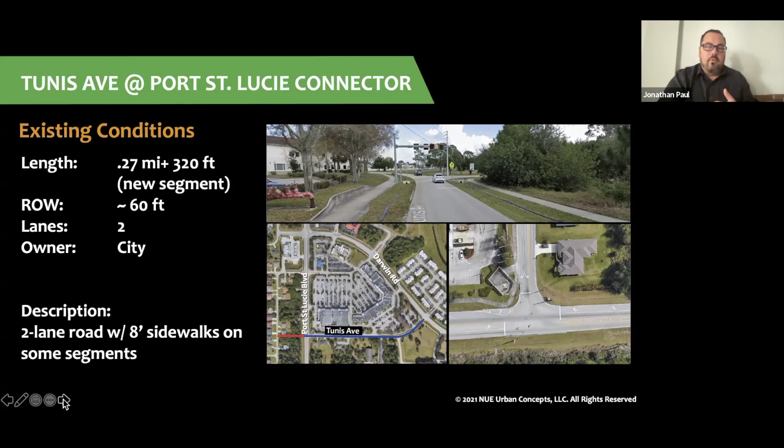In addition, there are a few other smaller roadways that we've looked at in terms of connections. This is one corridor that will be evaluated, Tunis Ave, extending over into the neighborhood. There are going to be several changes to roadways as part of the 4-laning of Port St. Lucie Boulevard, and this is going to have some impact on existing road connections in that area. So we've looked at this as one possible connection into that community to address some of the other roadways that may actually be closed off or have turning movements restricted because of the design of Port St. Lucie.

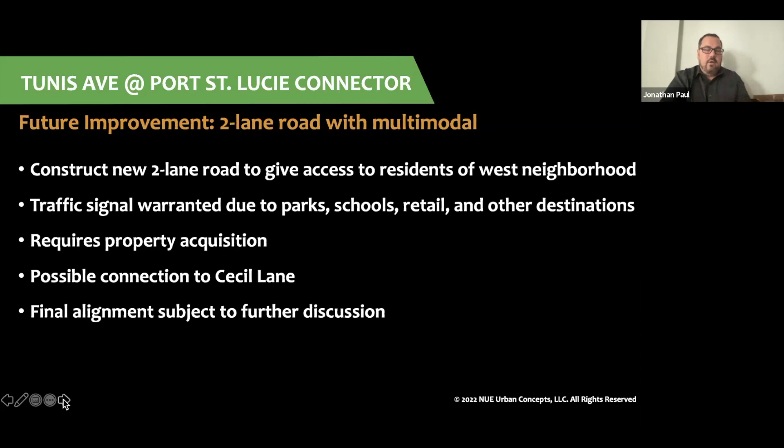Tunis is one. There's a lot of multimodal destinations - parks, schools, retail - in this area. There's a possibility that it could warrant a signal in the future if there was actually a connection to that roadway. Similarly, we're looking at an extension of Gig Place to Galibreath Avenue, because there are several roads further south of Port St. Lucie that are going to have access restricted, so there may need to be another way to have a neighborhood connection out to that roadway.

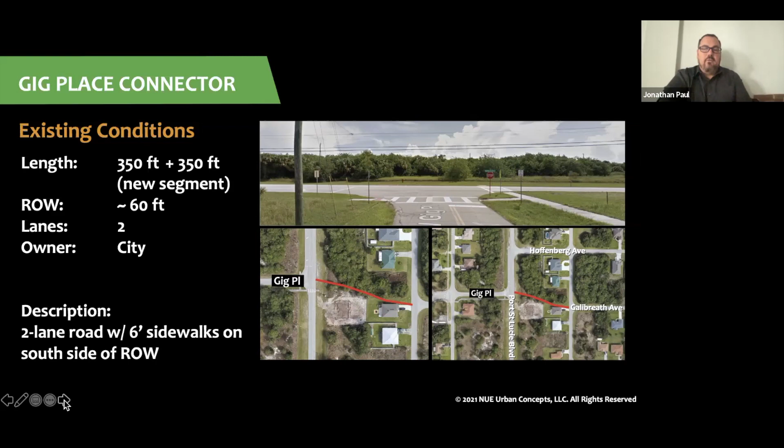Again, similar to Tunis, there's several other factors being looked at. The one corridor that we have not been able to propose any multimodal improvements to is pretty much the heart of the community, or a good portion of the heart of the community. And that's Port St. Lucie Boulevard from US 1 to Gatlin. It is a 6-lane divided roadway today. There are no bike lanes. The travel lanes are only 11 foot, sidewalks are 5 foot, and there are retaining walls along portions of both sides of the roadway.

So there's essentially nothing multimodal that can be done to Port St. Lucie Boulevard other than taking the outside travel lane and repurposing it to a protected bike lane and a dedicated neighborhood electric vehicle, autonomous shuttle, golf cart lane. That is one option - it could be done in a year, and it could be done for really cheap. But that portion of St. Lucie Boulevard carries over 50,000 cars a day, so that'd be a pretty big trade-off to recommend removing one of those lanes.

So to do that, we're actually looking at how do we make multimodal connections at all along that corridor, because a 5-foot sidewalk is not going to get anybody to actively walk along that roadway unless they have no other choice. So we're looking at parallel facilities - one, a multimodal bridge connecting the boardwalk that the city's already built on the east side of the St. Lucie River over to the west side, and running a shared use path coming down to Essex, going all the way parallel to Gatlin, and eventually tying into a multimodal trail or a shared use path on Oakridge or a future improvement here.

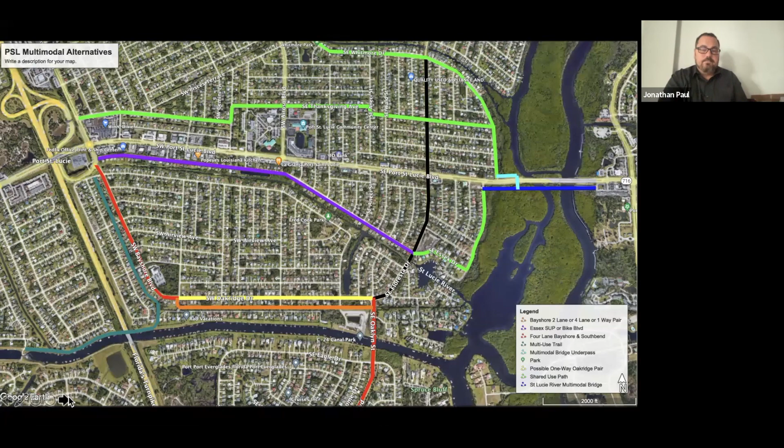So I know we've covered a lot in a little over an hour. It's something that's going to continue to be ongoing over these next few months, and as we go forward, more detail is going to be provided on the city's website. We'll start providing refined cross sections, finalize the maps, and then finalize the tables. All this will feed into not only a final adopted mobility plan, but eventually an update to the city's mobility fee as well.

So with that, I am going to stop sharing my screen for a little bit, and we're going to open it up to Q&A. I may need to go back to sharing my screen to refer to a specific graphic or map or question that somebody has. So with that, I think I may open it back up to Laura or Lauren to address any questions that may have been asked.